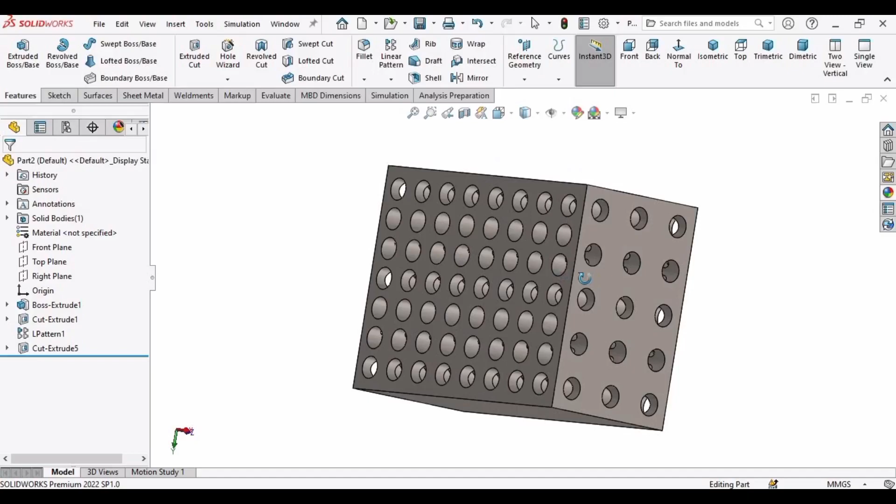Welcome to this video in which we will create this pattern by using the linear pattern command.

Let's begin. First, select File, click on New, select Part, and then click OK.

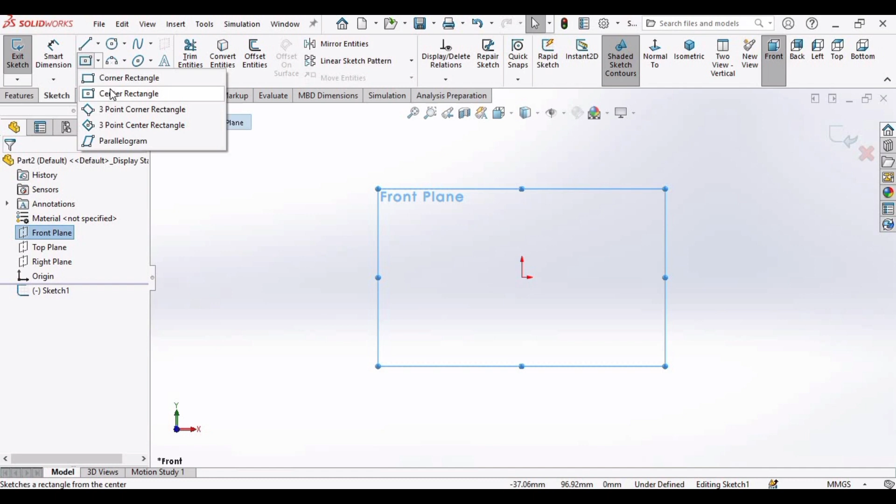Select the front plane, click on Sketch. Make a center rectangle at this origin. Now select Smart Dimension and set the length of this line as 200 millimeter and this line as 150 millimeter.

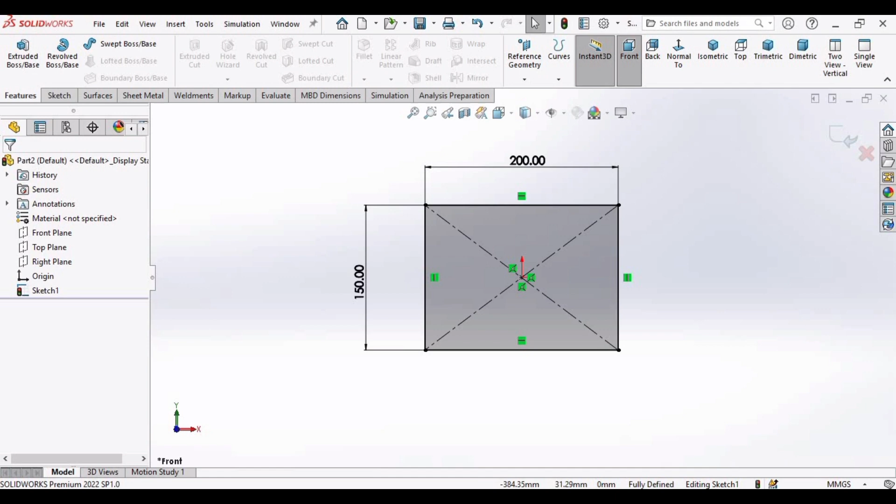Then go to Features, select Extruded Boss Base, extrude it up to 100 millimeter, and then check this box.

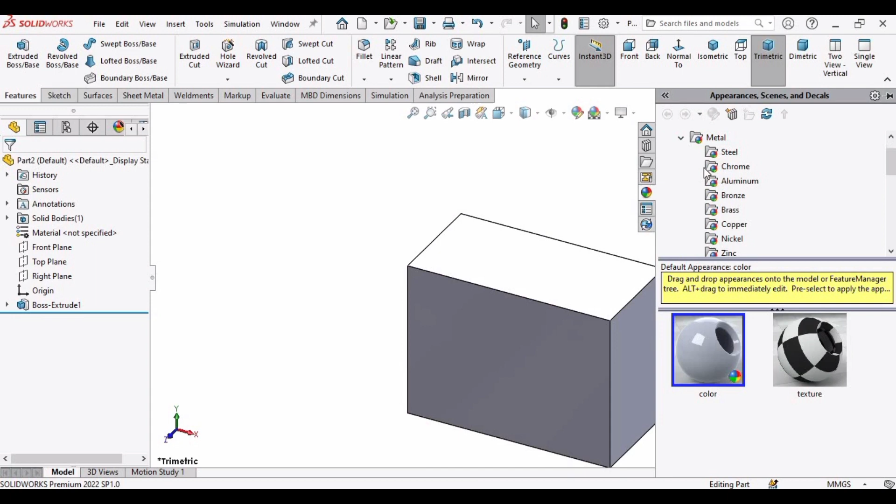Now change the background to plain white and assign some appearance to this part. Go to Metal, and in the Steel option specify this or any other appearance you like.

Now select this face, click on Sketch option, make a circle here, and now let's specify the diameter.

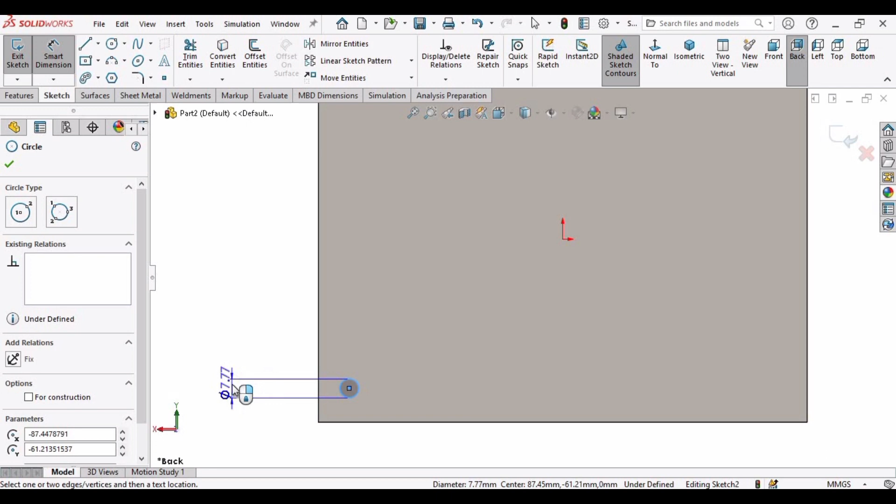Go to Smart Dimension, select this circle, and make the diameter of the circle as 15 mm. Select the center of the circle and this line and specify the distance as 15 mm. Similarly, select this line and the center of the circle and specify the distance as 15.

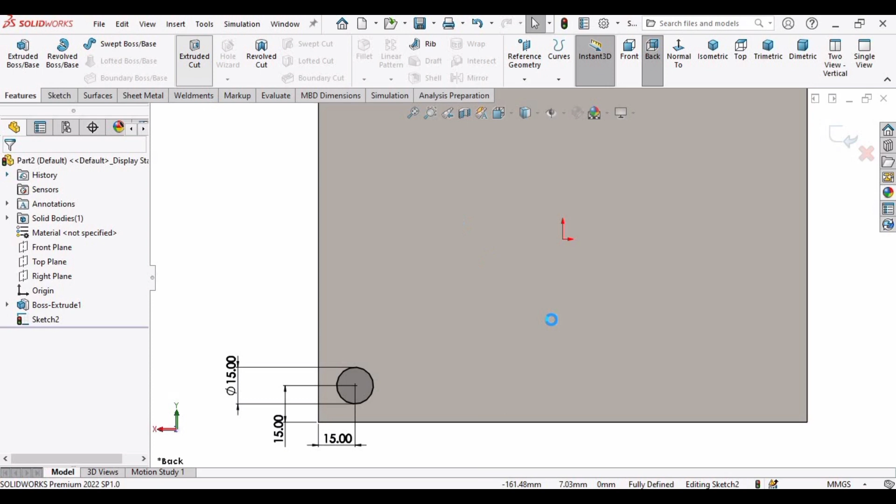Now go to Features, select Extruded Cut command, and in Direction 1 specify Through All rather than Blind, and just check this box. Here the hole has been created, you can see.

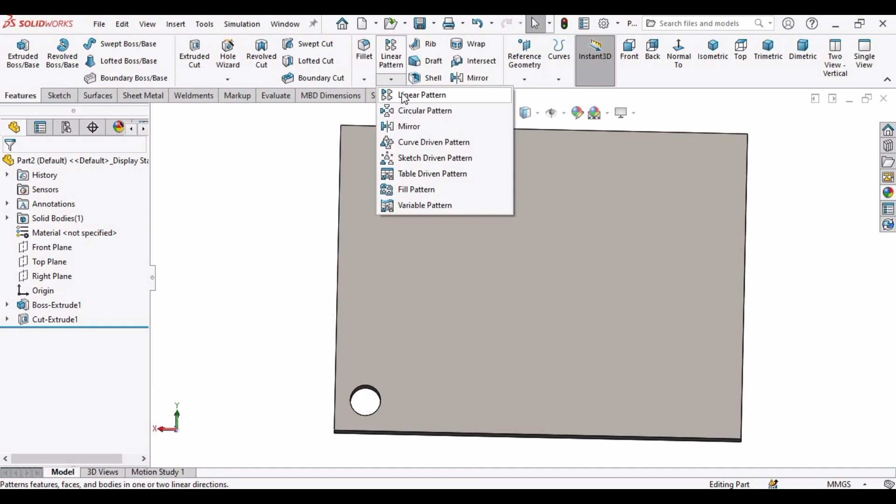Now go to this Linear Pattern command, and in Direction 1 specify this edge. Now let's specify the distance between the holes, I'm specifying as 20. Now select the Features and Faces window and then select this circle.

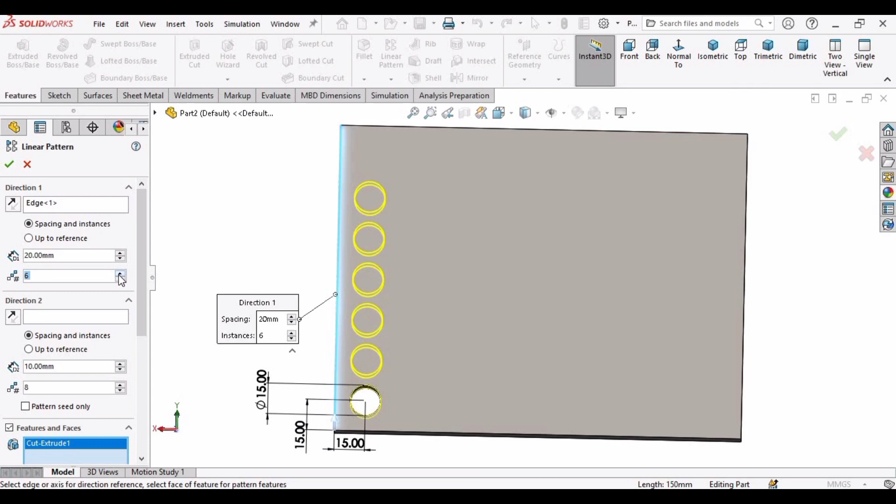Now increase the number of circles here, and here you can see the pattern has been created.

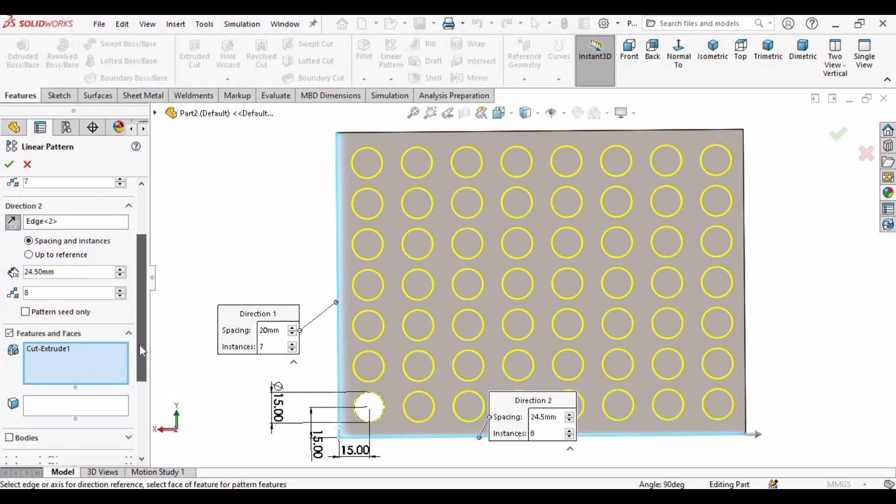Now specify the direction, select this window, and then select this edge, and here you can see the pattern has been created. Now adjust this pattern by specifying here 24.5 mm, and now we are done here.

Check this box, and here you can see the pattern has been created.

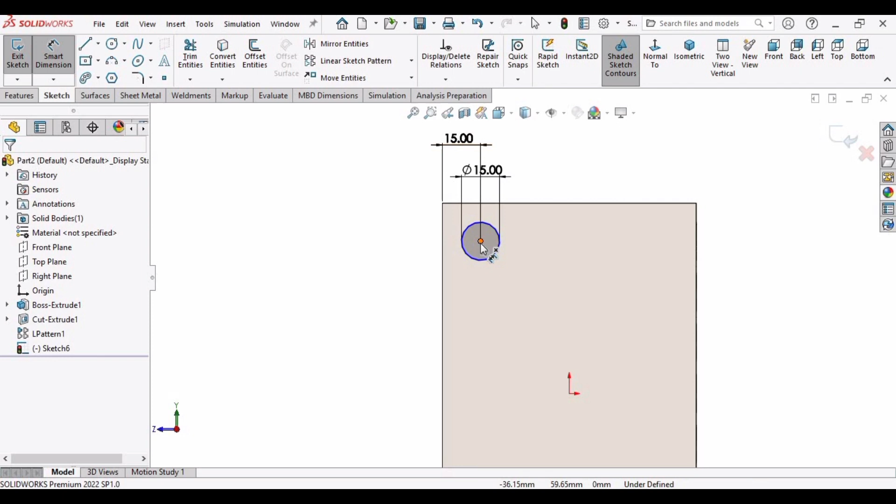Now let's make another pattern. Select this face and click on Sketch, make a circle here, then select Smart Dimension and specify the diameter as 15 millimeter. From center to this line the distance is 15, and from center to the other line the distance is also 15.

Select this linear sketch pattern, and in the x-axis select this edge, and in y-axis, that is Direction 2, select this edge.

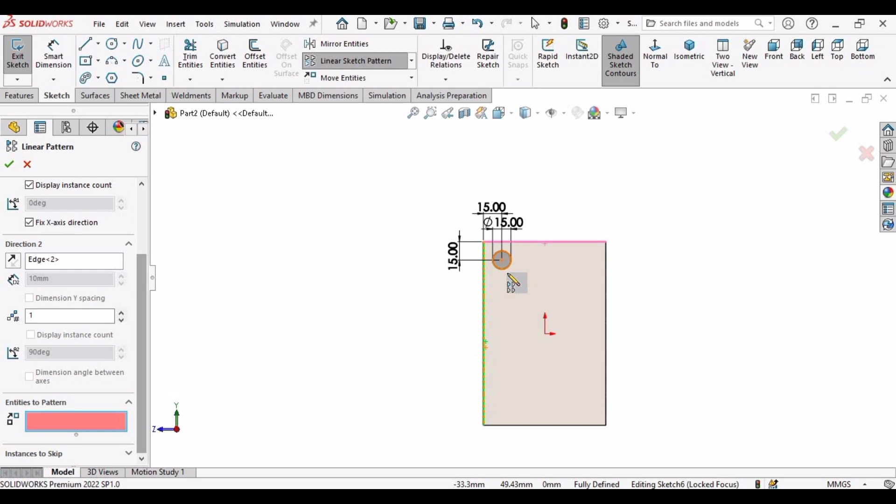Okay, so Entities to Pattern, select this circle, and here in Direction 1 increase the number and adjust the distance between the circles. 35 mm is the distance and the number is 3.

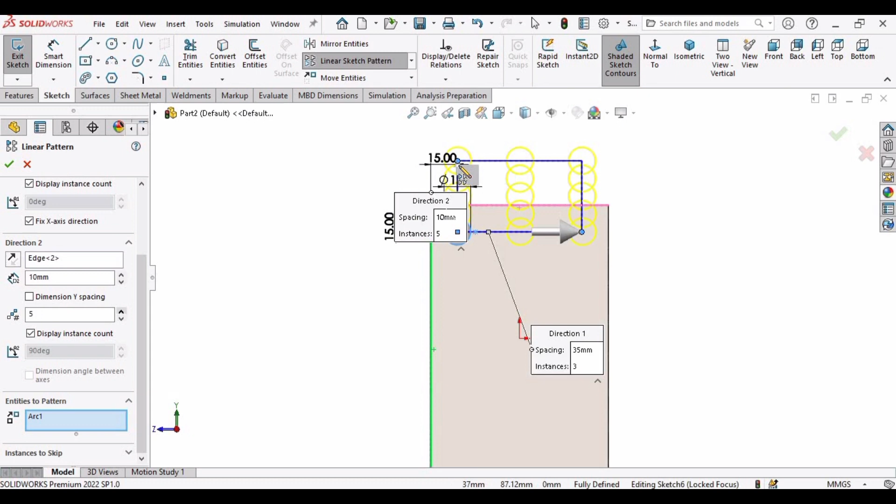Similarly increase this number, and here you can see they should be in the opposite direction. So in this option you can change the direction of the pattern.

And now let's specify the distance between the circles. Just click Enter, and here you can see they are adjusted now, and then check this box.

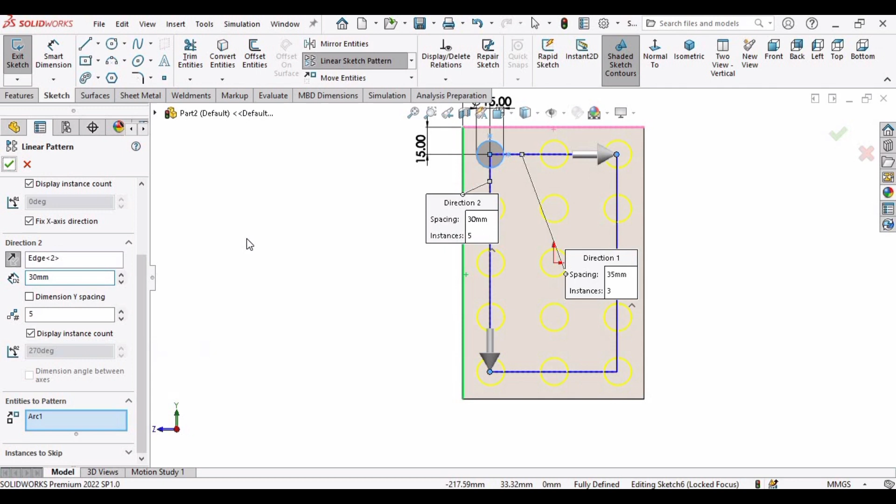Now it's time to cut these. For that go to Features, select Extruded Cut, make sure that you have specified Through All, and then click OK. So here the pattern has been created.